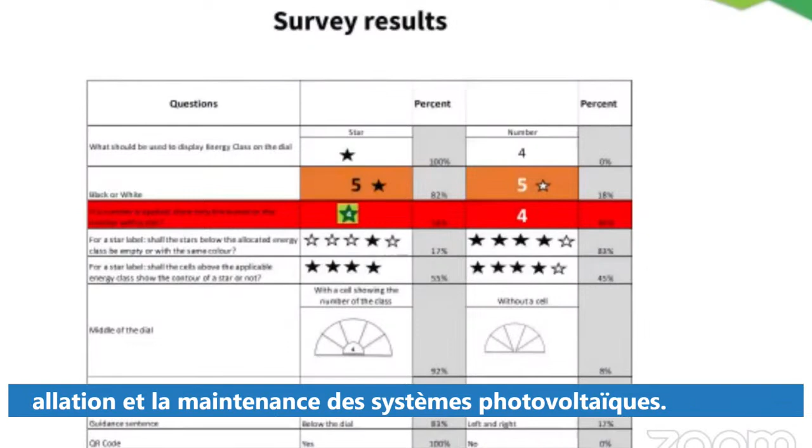At our level, we do not want to go far from what is already existing in the country. So we have tried to salvage everything in the member state, and based on that, we also went for the star type in terms of defining efficiency on the equipment. Initially, they thought we were going to go to the bar type, but when we went to the member state, we said no, our member states are using the star type, so there's no need for us to take the bar type like they use in Europe.

So this is what we are defining as star, and I think it's important to show it. So for a member state who wants to start developing the map at this level, let's think that we are already developing this one, which we are going to develop at regional level.

Now for the West African Clean Cooking Program training, we had a workshop on West African Clean Cooking yesterday in Plateau, so I'm not going to waste time on this one. We'll give you more time.

And then what we're also doing now, with new approach and new management, we're also working closely with the African Union, the AFREC program, since it was well ahead compared to other sub-regions. So we are trying to use our experience with AFREC and also share that experience with other sub-regions. We have been helping them develop the energy efficiency strategy.

And we are very much, remember, a couple of months ago, before the NFI meeting, we sent some questions to the member states, and we're very happy all the member states replied to those questionnaires. So in brief, that's what I have to say, and I await your questions. Thank you very much.

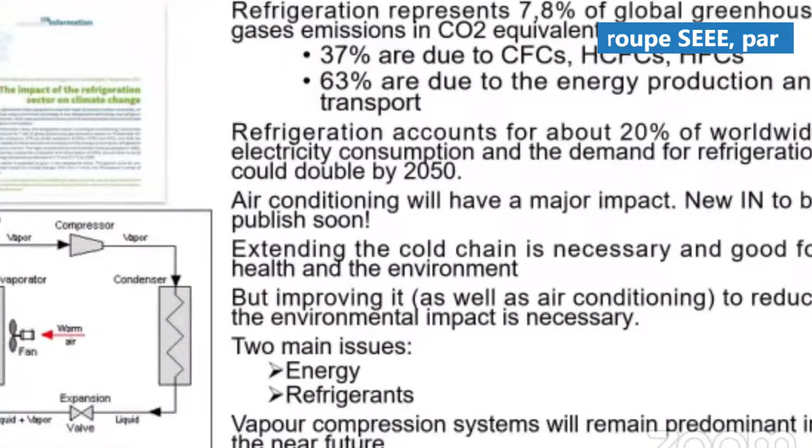So what are the consequences? There's the environmental impact, as electricity is mainly generated by fossil fuel. There's the infrastructure impact, as electricity needs will increase. And there will be some impact on costs.

So we need to take some measures, for example in sub-Saharan Africa, which include passive cooling, evaporative cooling, labeling, eco-design, and renewable energy. I will describe these in the next slides.

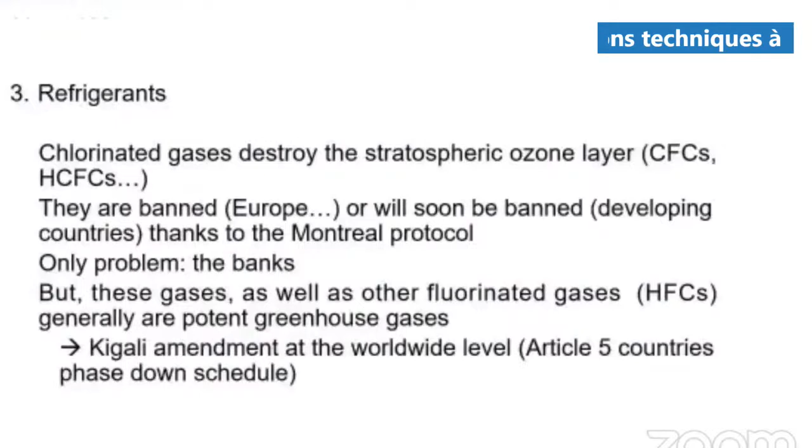First of all, the refrigerant: chlorinated gases destroy the stratospheric ozone layer. Now they are banned in Europe and will be banned in developing countries thanks to the Montreal Protocol.

But there's one problem: the banks. What are we going to do? How are we going to destroy those gases that are not used anymore?

But those gases, as well as other fluorinated gases, HFCs, generate significant greenhouse gases. So we've got the Kigali Amendment at the worldwide level, and under Article 5 we need to phase them out. Most countries have signed the Kigali Amendment.

So in terms of energy efficiency, we should reduce refrigeration needs while maintaining similar effects. We've got various solutions like passive cooling. As I mentioned, we have information notes accessible on our website, including one on passive cooling.

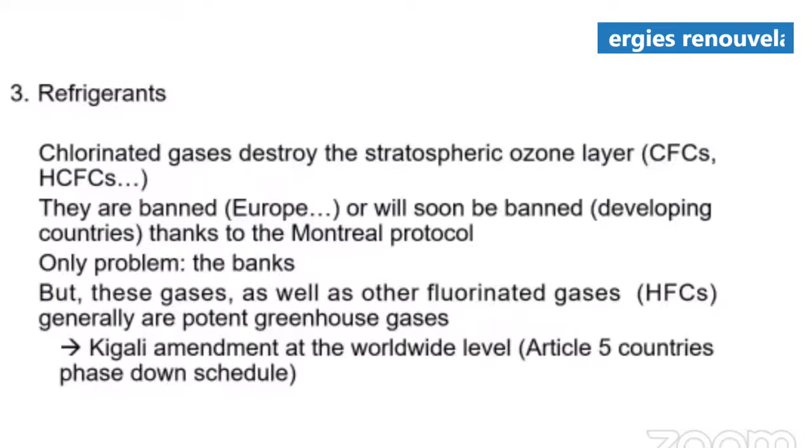We need to focus on prevention and reduction of heat gain through insulation, orientation, and cooling painting. We've got heat dissipation methods like cooling in the ground or night ventilation, radiative cooling toward the sky, and evaporative cooling. So there are various solutions.

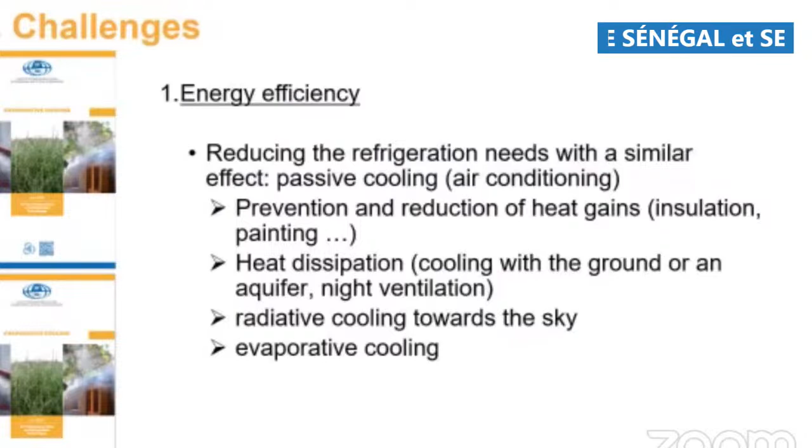Also, for more general systems, not only air conditioning but district and central cooling. In factories too, we need to optimize cooling and heating needs, and also use waste heat or cooling.

The energy efficiency of a refrigeration system depends on its components and the refrigerant used. We've also got labeling standards.

As mentioned before, there's a minimum energy performance standard for air conditioners and refrigeration, which ECOWAS is currently harmonizing.

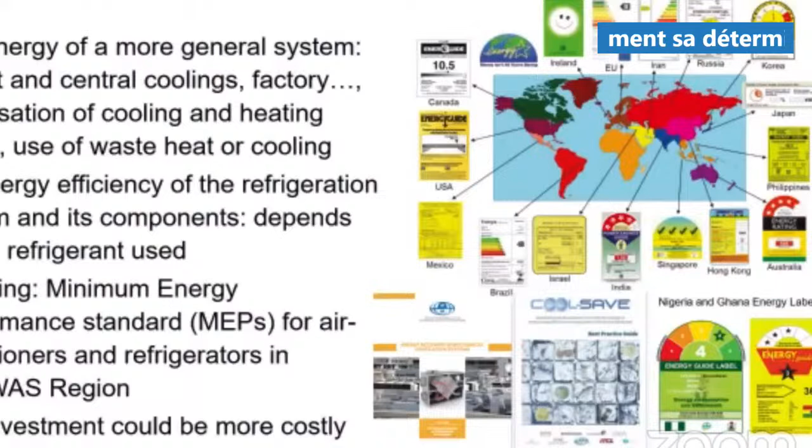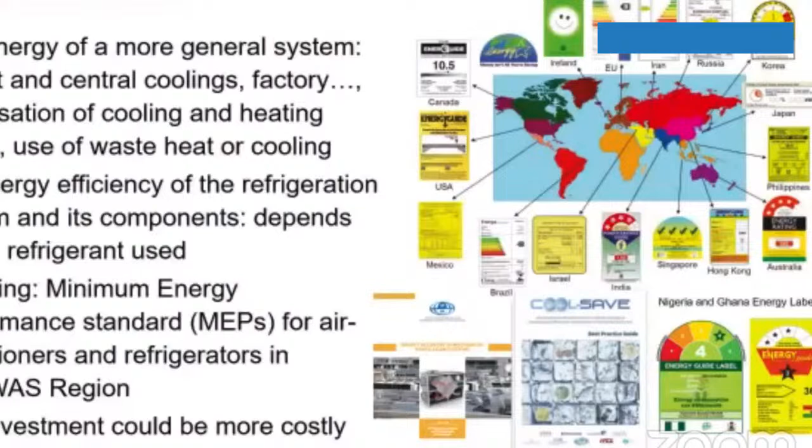But we could also apply renewable energy. We've got various options, and this will be the focus of a second project. There's transitional energy like LNG, hydrogen, biogas, and wood, but mostly refrigeration uses electricity.

We've also got wind energy, solar energy, thermal energy and storage, and solar cooling. We've got information that will be released very soon, or it's already on the website.

We also need to take into consideration the refrigerant, using low global warming potential refrigerants, by first reducing leakage and also reducing the refrigerant charge in the system.

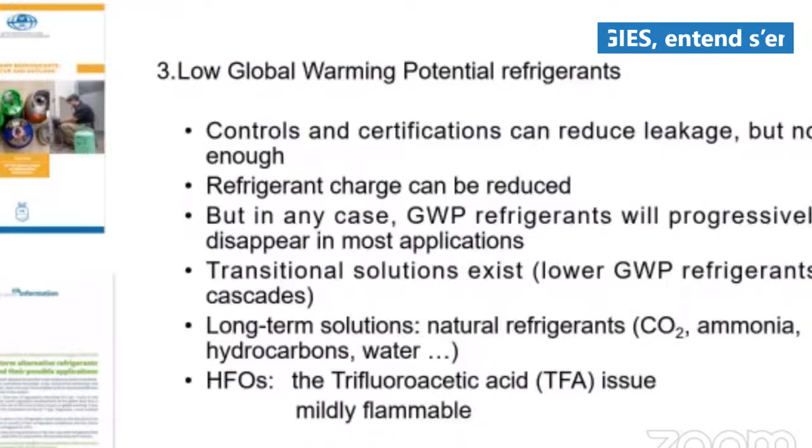High global warming potential refrigerants will progressively disappear, but we have transitions, like using low GWP refrigerants. However, some of these refrigerants have restrictions, such as CO2, which operates at high pressure and is toxic and has a high investment cost, or ammonia and hydrocarbons, which are flammable, with ammonia also being toxic.

Still, we need national and local regulations to evolve, and technicians and engineers should be trained for this purpose through national associations.

My conclusion is increasing the need in refrigeration capacity, increasing environmental and energy constraint, training and updating the information are needed, and the institute would help with all the publications and services. If you want to become a member, you can go to the website.

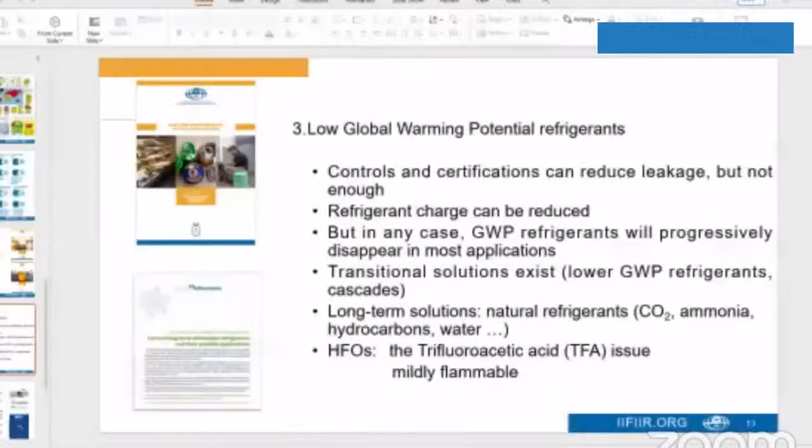I wanted to show a video of a project that's been funded by the European Commission. If they can display the video of Sophia, we apply natural refrigerant combined with thermal and PV systems in Africa, in sub-Saharan Africa. It's a video of 1 minute.

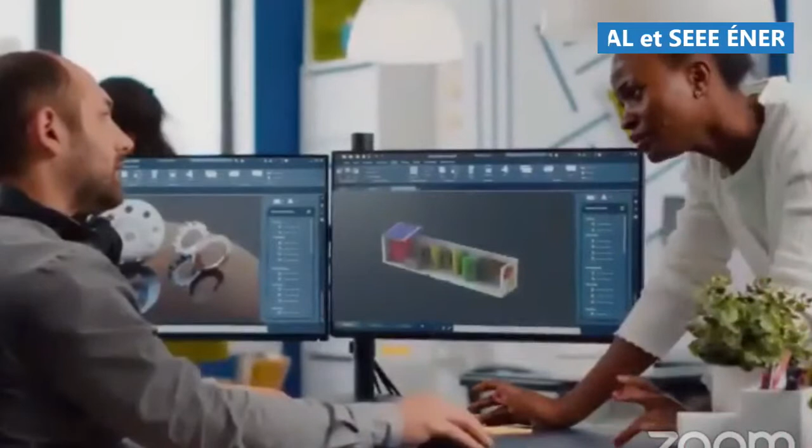Access to green energy and clean water is still a challenge for many health centers in remote areas of Africa. The Sophia project, funded by the European Horizon 2020 program, is developing sustainable cooling, heating, and clean water solutions for rural and remote hospitals. The Sophia teams are developing 2 container solutions, modular, adaptable, and powered by solar energy, which can be easily integrated into existing infrastructures.

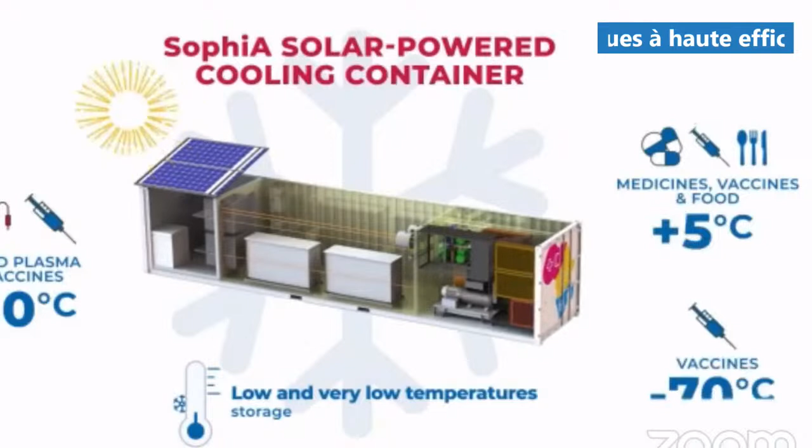Using natural refrigerants, the Sophia solar cooling container will provide low and very low temperature storage of blood plasma and sensitive drugs, cooling of medicines, vaccines, and food. Thanks to photovoltaics, solar thermal collectors, and Scheffler reflectors, the Sophia water container will provide safe drinking water and pure water for medical purposes, steam and hot water.

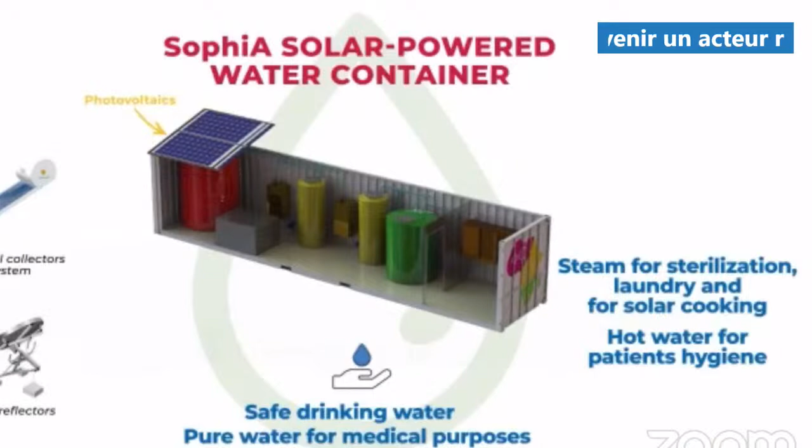Thank you very much. If you'd like more information about the Sophia project, please come to the presentation in the women and youth session. We've also got some brochures at the IIR stand near the exhibition. Thank you very much.

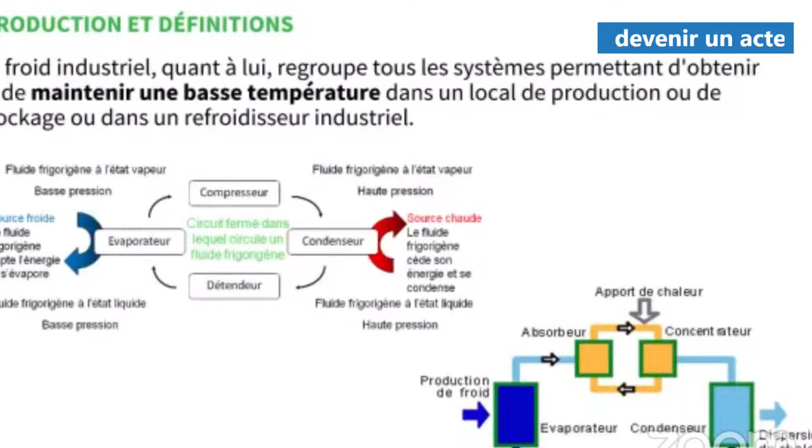Voilà, on va voir ensemble un système de réfrigération. Il y en a d'autres, ce ne sont pas les seuls, mais vous avez des augmentations. Il y a d'autres composantes dans ce type de système.

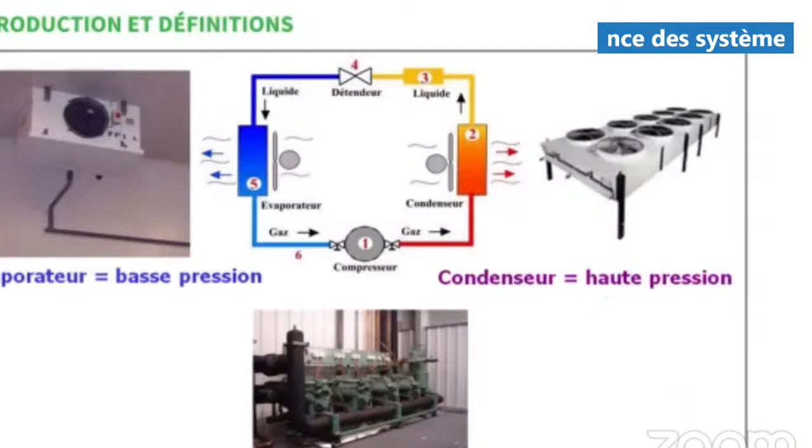Donc, on a des solutions qui sont au-delà de chaque aspect technique. Donc, c'est une démarche.

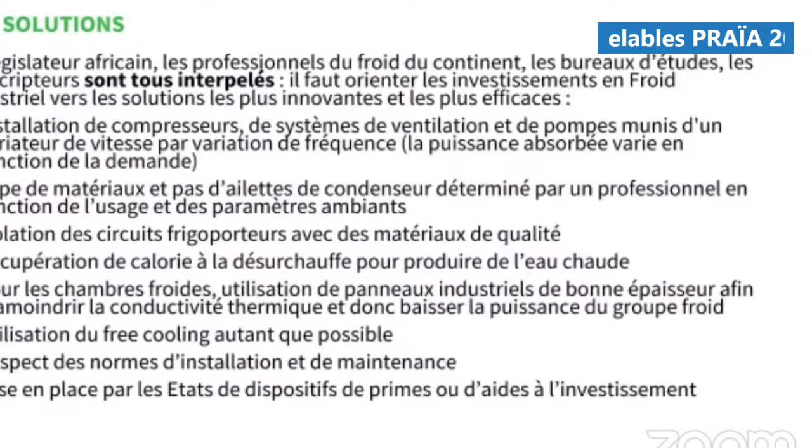Mais il a fallu user de tout le talent de persuasion pour faire accepter à nos clients un cycle non négligeable, en leur disant que c'est un capex élevé, mais qu'en fait, c'est un retour sur investissement. Voilà, après, il a fallu finir de les convaincre, et il a fini par accepter.

Au niveau de la conception des condenseurs, je pense que les tubes sont doublés de manière à permettre un meilleur échange thermique et donc à générer davantage. Il y a aussi l'isolation des circuits avec des matériaux de qualité, sur lesquels les constructeurs, les fabricants de qualité s'appuient de manière à pouvoir faire également des gains en termes de rendement.

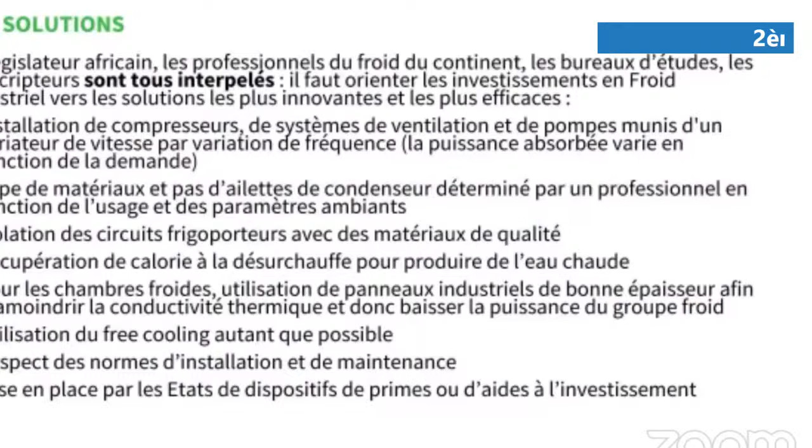La récupération de calories qui permet de faire à la fois du froid, mais également de chauffer de l'eau, dans des hôtels, des pensions, de l'énergie pour pouvoir chauffer de l'eau, tout simplement. Pour les chambres froides, des panneaux industriels.

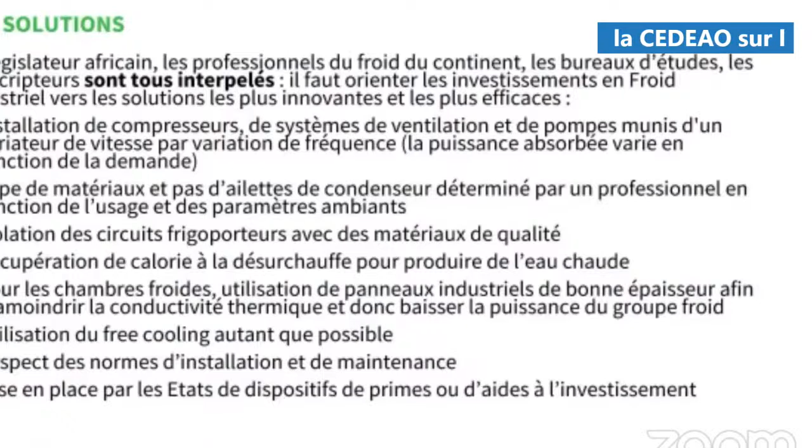Cela, évidemment, sur le plan technique, implique le respect de certaines normes d'installation et de maintenance, j'insiste sur la maintenance, et aussi la mise en place par les États, malheureusement, car cela a un coût, de primes, de dispositifs d'aide à l'investissement.

Pour ça, il n'y a pas le temps de présenter. Alors, voilà, plus ou moins de manière imagée et ramassée. Vous avez l'avant, vous avez ce que vous pouvez avoir.

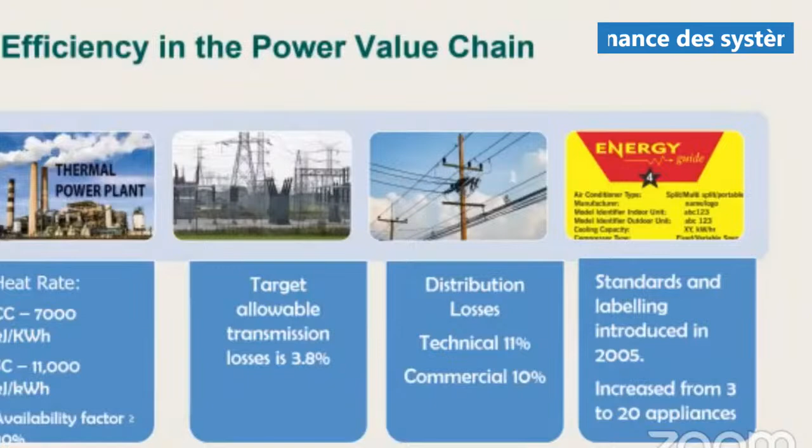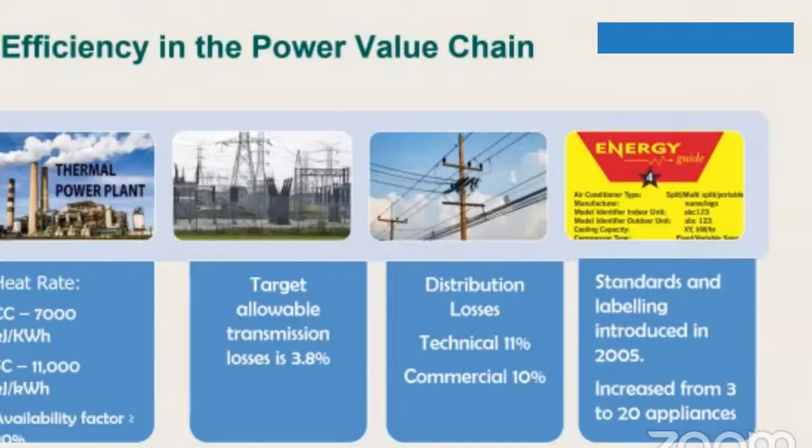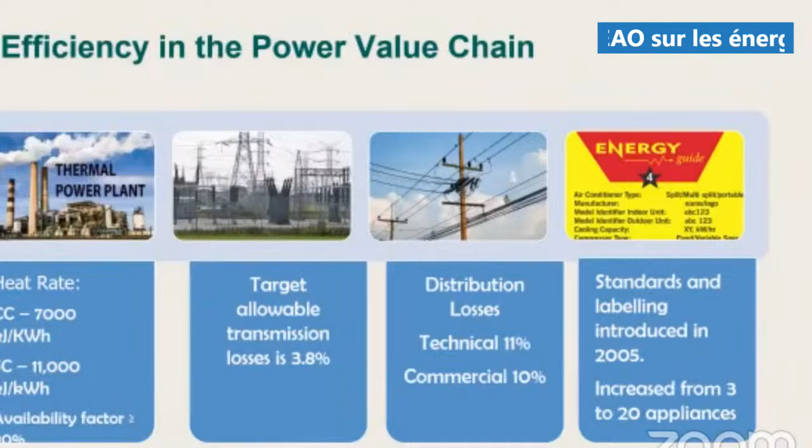But let me start by saying that things do not happen by chance, but they are forced to happen. In the electricity value chain, what we don't pay much attention to is the end user. But whatever happens at the end user stage has a rippling effect on distribution, transmission, and eventual generation. So if you want to have a way of regulating how often you add on to your generation capacity, strengthen your transmission and distribution so as to minimize losses, then you cannot lose attention on the end user.

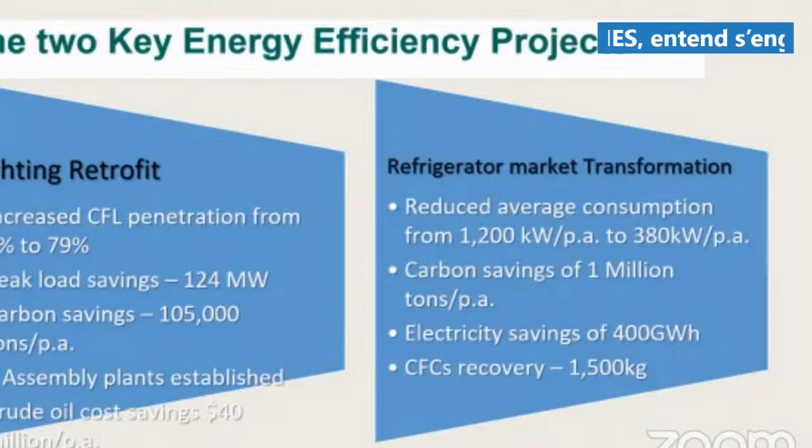In 2005, Ghana decided to chart a path that will make the economy an energy efficient economy, because we could project that the population will grow, disposable income will also go up, and people will start looking for ways to be comfortable. And all these have impact on electricity consumption.

So we selected 3 major appliances for various reasons: lighting, refrigerators, and air conditioners. We selected lighting because of its penetration rate. Refrigerators were also selected because of penetration and consumption rate, because refrigerators run 24/7. And finally, we selected air conditioners because of the high consumption and the fact that they impact business profitability, and also government pays most of the bills when it comes to AC. So these were the underlying reasons for which these appliances were selected.

We made market interventions in 2 of them, lighting and refrigerators. We did a lighting retrofit in 2008. We were left with incandescents, which are high energy consuming appliances left by our colonial masters. But with time, we could no longer afford to provide the energy that would light all those incandescents, so we changed to CFL. The market intervention was that government provided $15.5 million to import 6 million CFLs and distributed them for free in exchange for the incandescent. The result was a savings of 124 megawatts peak load, and that solved the problem of brownout, blackout, transformer overload, and what have you.

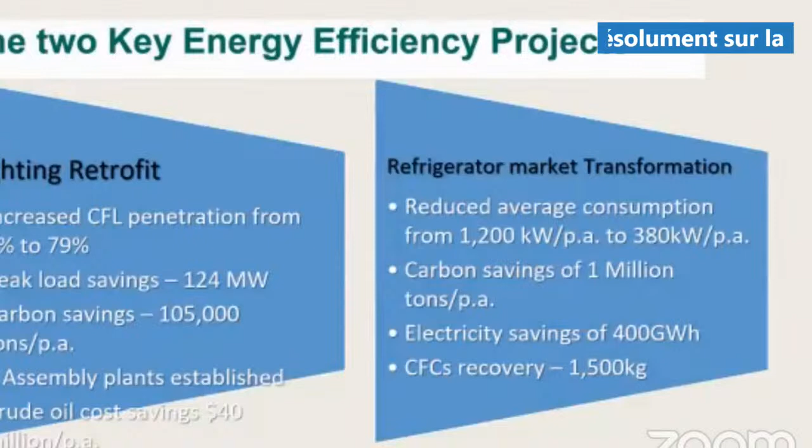So with that encouragement, we tackled refrigerators. Before the laws regulating refrigerators were passed, Ghana was a dumping ground, if you allow me to say that, for refrigerating appliances. Those used, obsolete, discarded, and unwanted fridges in Europe all found their way to Ghana, and it commanded about 80% of the refrigerating appliance market. So it was terribly bad. On average, each was consuming 1,200 kilowatt hours a year, compared to 250 in Europe and 400 in the US. You realize that those of us who did not have the energy were rather wasting it.

So that is why we decided to make a market intervention to speed up the uptake of usage of new and efficient refrigerating appliances in Ghana.

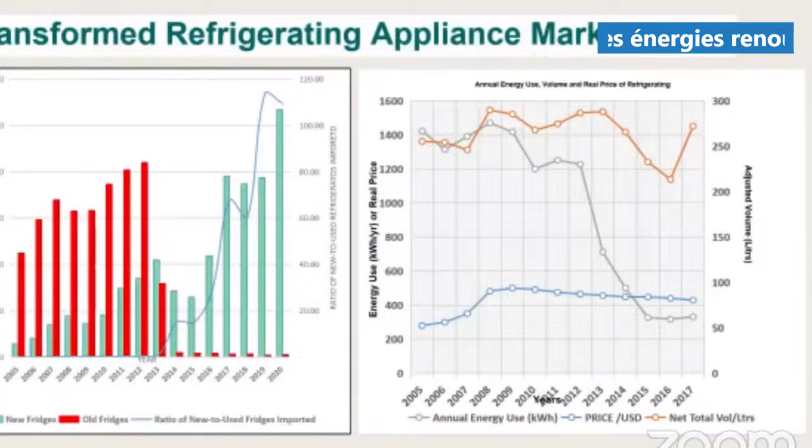The simple explanation is that in Ghana now, regardless of the size of the refrigerator, you see consumption coming down. The line that you see steeply diving down is energy consumption. The orange line is the size of refrigerating appliances, and the bottom bluish line is price.

So you realize that if you do standards and labeling, it is not absolutely correct that it will affect prices. Eventually, competition pushes prices down, consumption will also be pushed down, and volumes will remain the same, and this enhances consumer welfare.

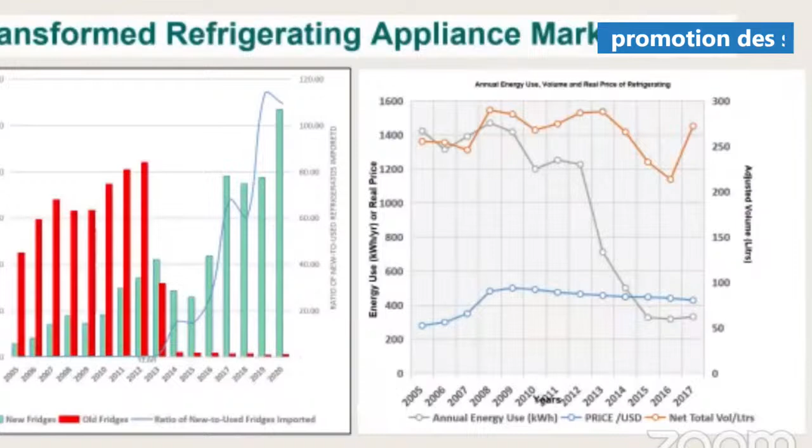To be able to help consumers differentiate between genuine labels and fake labeling, we have this app on both Android and iOS. You can try it and download the certified appliance app.

Consumers who have this app, at the point of purchase in the shop, just consult the app and key in the model number of the appliance that you want to buy. All the details, including consumption, refrigerant, and how much you are going to pay in monetary terms by running it for a year, will be there.

If the label is fake, the app will tell you that it is fake. And there's a trigger to the office that somebody has entered a model number which is fake, and then we will do a follow-up.

We have done some institutional energy efficiency, a low-hanging one, which is the installation of capacitor banks. This is what we use as a teaser for the industry to start looking at industrial retrofitting. Regardless of how much money you invest in retrofitting, the payback is very short.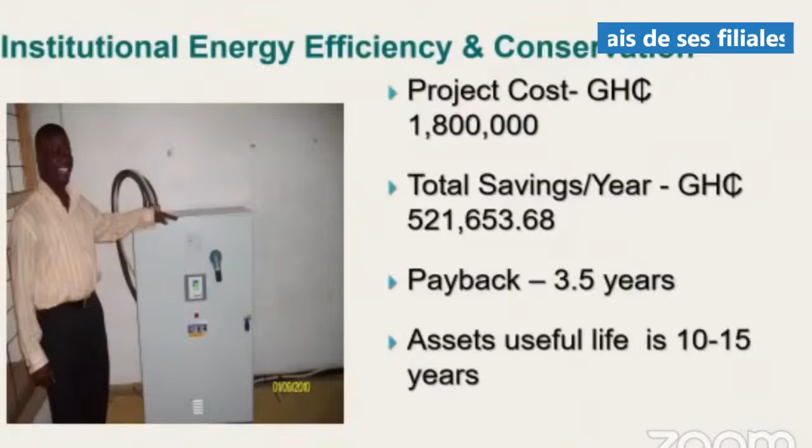By the application of MEPS, standards and labeling, Ghana has joined the community of nations that have been able to decouple economic development from energy consumption. The business as usual is that as you develop, your consumption also goes up. But if you apply energy efficiency, you realize that your economy will grow and then your consumption will decline.

Refrigerators are now consuming less than 200 kilowatt hours a year, down from 1,200. Consumers are saving between $80 and $100 a year, which is enough to replace refrigerators every 5 years. And that savings is enough to put a child to school in Africa, especially the girl child. And the benefits are spread across, everybody is a beneficiary.